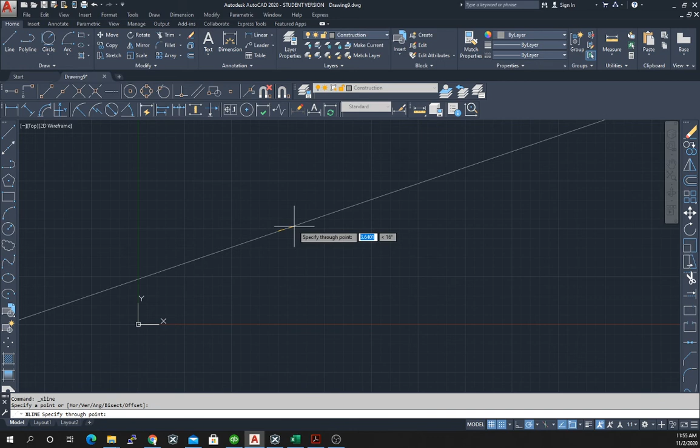So, anyway, I'm gonna start right here, and I'm gonna start on an X line, and I hit return, and this is my construction line, so it makes a line of infinite length. I'm gonna make a horizontal one, and then I'm gonna make a vertical one. So now I have two construction lines. This was basically going to be my starting point for my drawing, for my corner. So if I go back to my drawing, this will be the starting point over here.

Now what I've decided beforehand is I'm going to start with this point 8 inches over here, and this point 8 inches over here, and then this point 6 inches down, and this point 6 inches up. So I'm going to be 8 in this dimension and 6 in this dimension. So I'm going to just make some more construction lines.

We're going to go back to AutoCAD, and again I'm going to choose construction line, and now I'm really just doing grid snaps here. So I can start here and I can go 2, 4, 6, go up to 8 and make a line, hit escape, go to construction line again, come down 8, hit my mouse button, make a line. I said 6, but I went 8. That's fine. We'll leave it at 8.

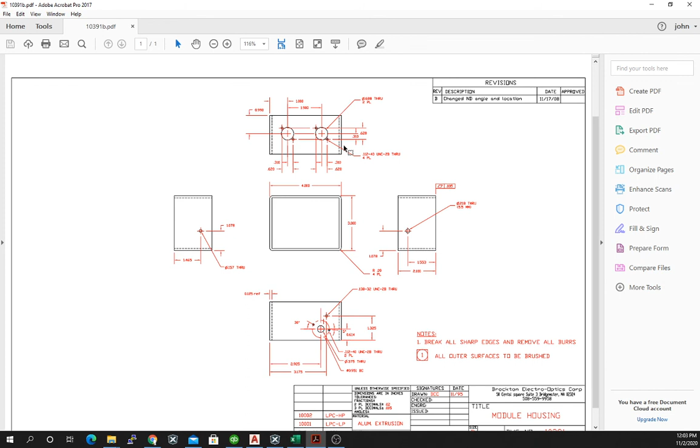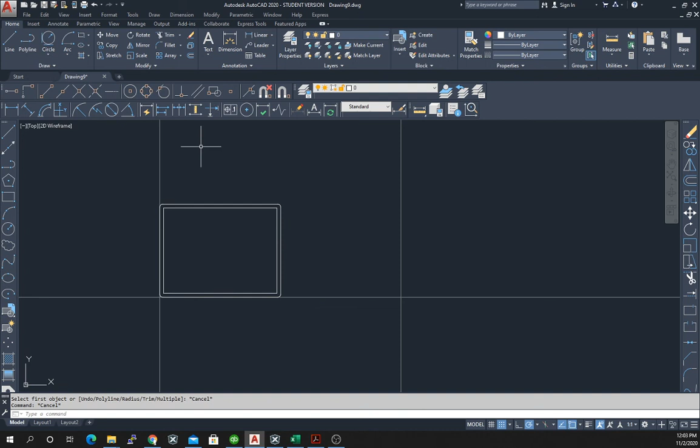Let's move up to this piece here. So here we have another polygon, and its dimension is going to be what? Well, we know it's going to be 4 inches in width, and then in height, the height is actually specified over here, 2.1 inches. So we can come over here. Move over to here. Choose our polygon. Choose our starting point. Hit return.

And then we said 4, 2.1. 2.1, enter, and that places our box. Now, this is the same box that's going to be down here. So let's just copy and move it, or make a copy and put it down there. So we're going to click on this. We're going to choose copy. Now we're going to choose this lower corner as a copy point, because that way we can just bring it directly down to this point.

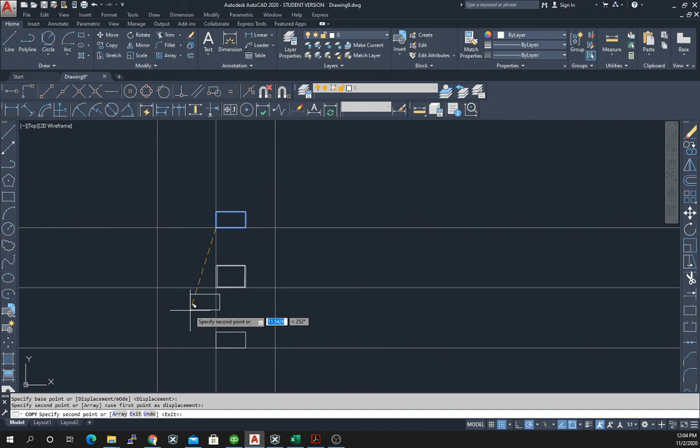All right, so before we continue, we're gonna take a look at 2 things. One is we see that because of the way we're placing, I guess we have the same space here, but we have a pretty large space between these two, between here and there and here and there, relative to what we see on our drawing. And remember, I'd used 8 inches instead of 6 inches. And I think I'm going to correct that. So how do we correct that?

Well, we can just move our construction line. So we can grab it here, and we can move it up. I don't know, let's move it up by 3 inches. Let's move it up by 2 inches. So we start moving it up and type 2, enter, and then we can take this one, move it down by 2,

and then we can do a move of this guy down, and then we can do a move of this guy up. Now in this case, I didn't actually move to the construction line. Oop, and that time I did an erase. So put it back. We select. We want to do a move, and you actually have to use the right click to do the move if you're going to move it so that you move it directly in this manner.

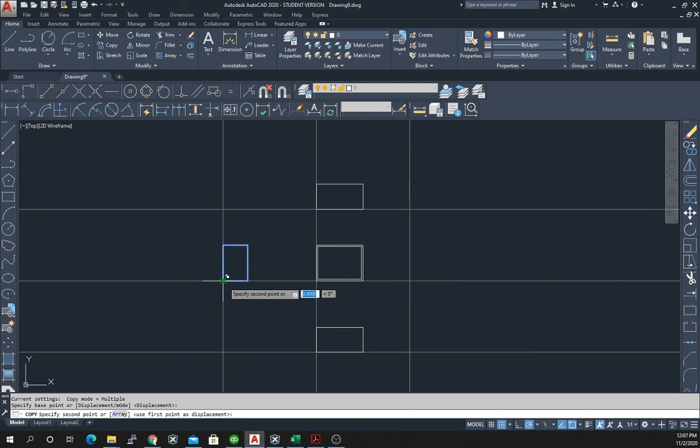So we come back to AutoCAD, and then we're going to make another polygon. And now we're 2.1, 3, enter. Copy. And let's move. I'm going to leave these the way they are.

And the reason I'm going to leave these the way they are has to do with print sizes. If you notice, prints tend to run in a landscape mode, and you have more room horizontally than you do vertically. So it's okay if we have extra room on this side. So we're going to leave those as is.

All right, so now that we have those, we need to start adding the other features. Well, what are the features? Well, we have the hidden lines. So let's go through and add all of the hidden lines. So on the top and the bottom here, what we have is a hidden line, if we go back to the print for a second, that is shown from the top to the bottom, .125 inches away from the outer edge.

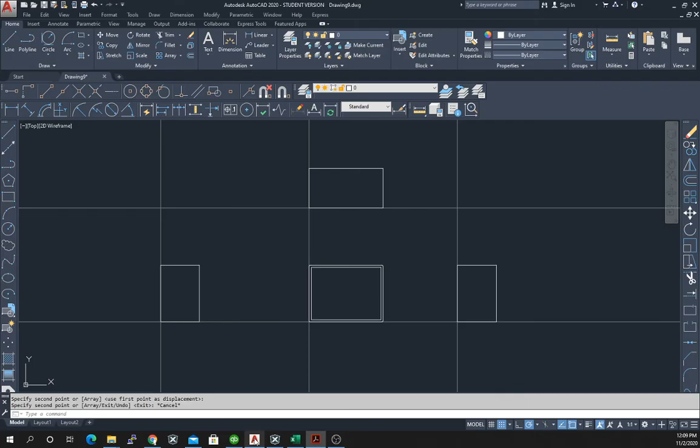So what we can do is we simply come over here and we can take a line. Now, what we want to do, it looks like, do we have tracking? Yeah, so once we get a tracking line, we can type 0.125, enter.

Got to restart that. We first want to change our layer to our hidden layer. Now we can choose our line. Now remember, we don't want to hit our mouse button on the corner. When we're on the corner, we simply pull away. And it's hard to see that you actually have a tracking line. So what we're going to do is turn off our construction layer.

So let's go to our construction layer and click right there. Now the way these layers work is you don't see that something gets turned off until you actually go back to the screen. So once we come back over here, you'll see the layer gets turned off. So now we're in hidden layer, we choose line. Once we're there,

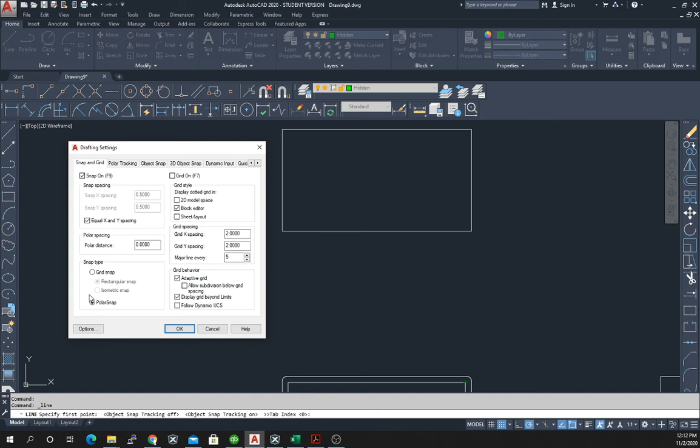let's see what we're set up for. We're on Polar Snap. Object snap tracking is on. Snap cursor 2D reference points is on. Let's look at the snap mode here. Look at our snap settings. Our snap is on. Grid is off. Snap type polar snap. Yeah, we're okay.

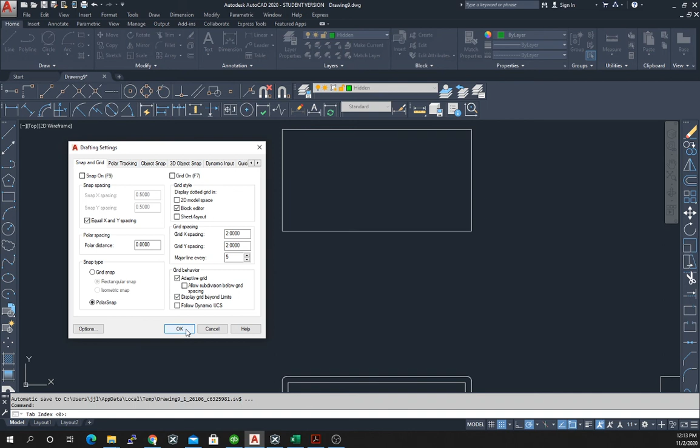All right, so there we go. There's our line. Once we see our line, we're still snapping in 0.5 inch. It wants to snap in those 0.5 inch increments. We can override that, but I'd rather just turn it off. That snap needs to be off. Okay, so see now we can actually move anywhere. It doesn't really make a difference because when you type your 0.125, it still works, but it makes it less likely that you'll make a mistake.

So I type my 0.125 and I move up, and when I get to the intersection at the other side, I hit my mouse button. And now I can hit escape. And what I can do is select this, and then copy it. I'm going to choose the base point at the top here. And then I'm going to move it right to the corner.

But then I'm going to back it back this way. And once I start backing it back that way, I'm going to type 0.125. And it didn't do it. It referenced back to that point. So there's two ways you can do this. You can move this all the way to here, and then select it, and then move it 0.125. The other way is you can calculate, if you know this is 4 inches.

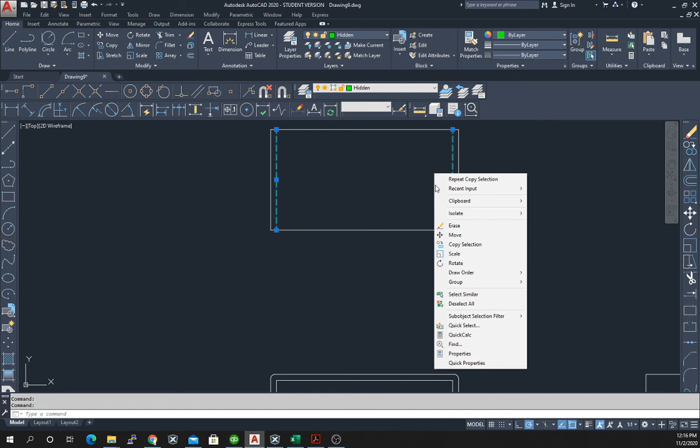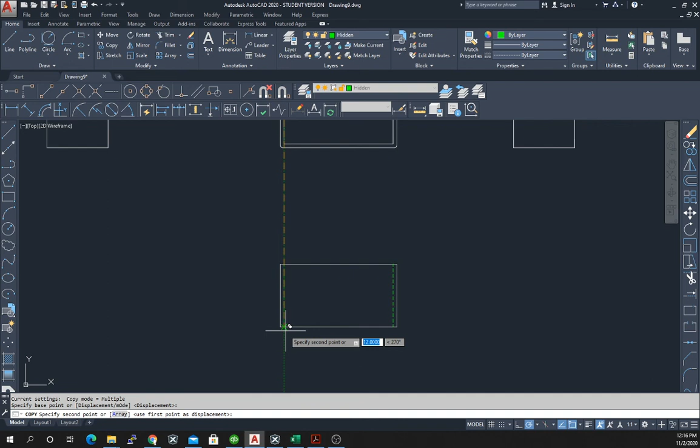Now in order to do the one on the bottom, we can just copy and move this. We can select these 2, then do a copy. Now I'm going to select it from here, and then we can move it down. And it turns out that it looks like the dimension is exactly 12 inches. So we can place it right there.

Now the ones on this side, you can do in a similar manner. And in fact, there are again lots of ways to do this. If you wanted to, you could break this up into parts and then just take this piece, copy it, and change the layer. You could use a snap from.

0.125. Then this, I'm not using snap from here. Again, I didn't hit my mouse button on that point. I just use tracking to space it off. So I place it there.

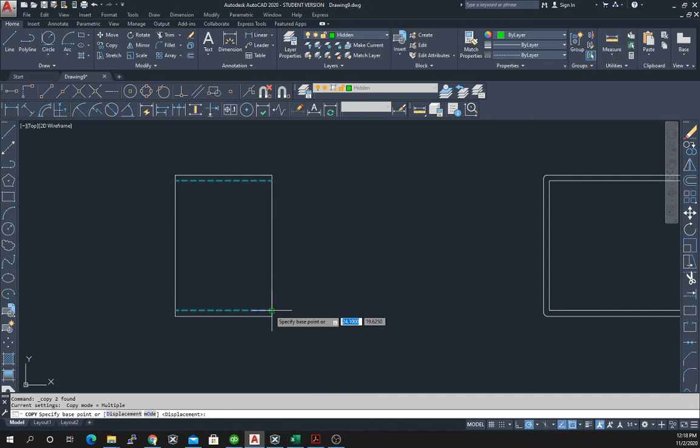And as I said, if this dimension is 3, then the other one has to be 2.75 up. So I can do copy, select, and then move up by 2.75. Enter. And then I can select both of these, copy, choose it here, and then move over to this one. And in this case, we happen to be 16 inches.

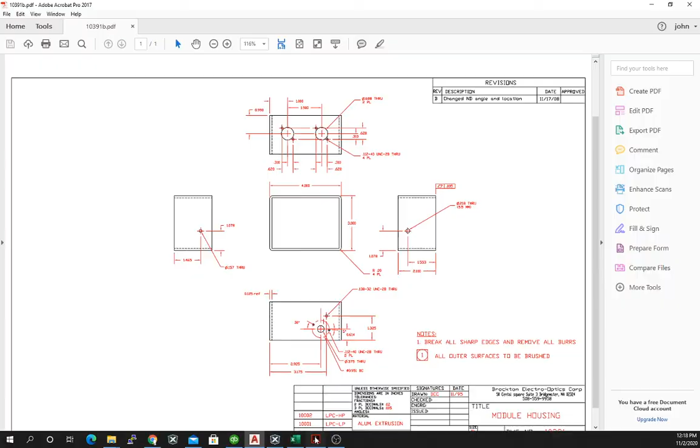All right, so now we have the hidden lines placed. Let's go ahead and go back to the drawing.

We have a 1.078 inch hole located, a 0.157 inch hole located 1.465 from this corner and 1.078 up. And this is typical, that you don't end up with round dimensions. So I'm going to write this down: 1.465 in the X, 1.078 in the Y, and 0.157 through.

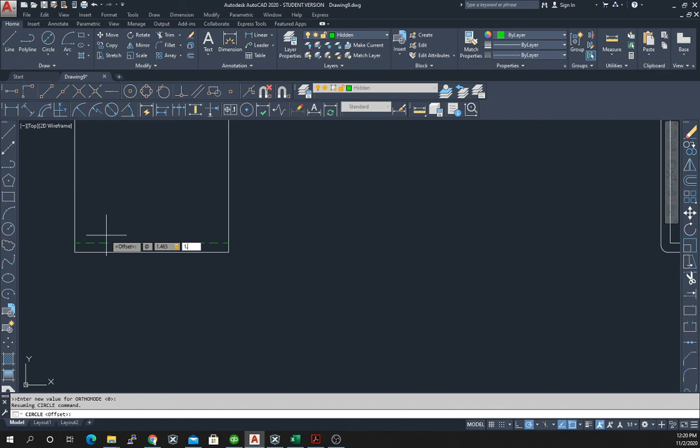Come back to our drawing. And that was a diameter, so we're going to come up here, choose circle diameter. Here we are going to choose snap from. I'm going to click on this corner and then type at 1.465, comma 1.078, enter, and the diameter is

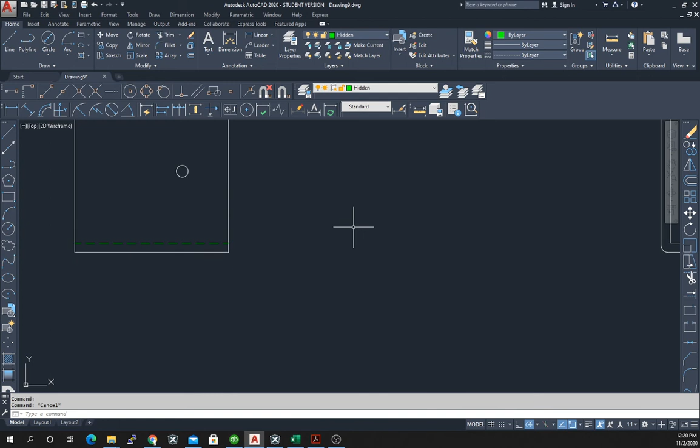0.157. Now you can already see I'm doing this in hidden, which is incorrect. So I need to select this once I'm done, go to quick properties, and then change my layer to layer 0. And again, reminder, the color, you generally never change it from by layer. You don't want to change the color there. You always want to change the layer to make the color different. I'm sure there are some extreme reasons why you might need to do that, but generally that's not the case.

All right, so the hole on the other side, we take a look at our print. It's 1.553 in the X dimension, and it's going to be negative, and it's also the 1.078. The diameter is 0.218.

So we come back to our drawing, circle diameter, snap from, we select here, we type at minus 1.553, comma 1.078. Enter. Oh, and I guess I forgot to change the layer again. 0.218. Enter. But again, that's perfectly fine.

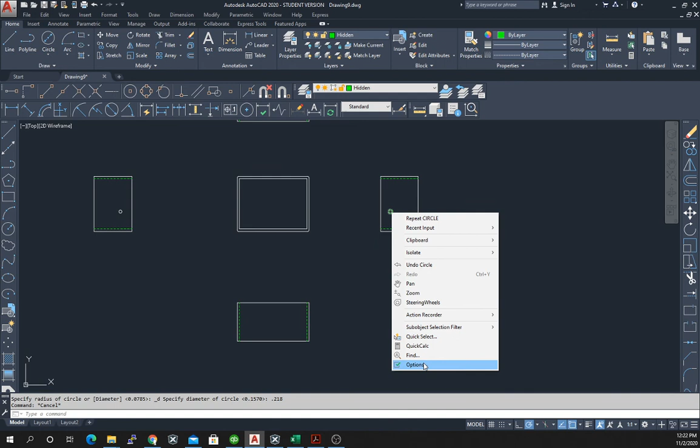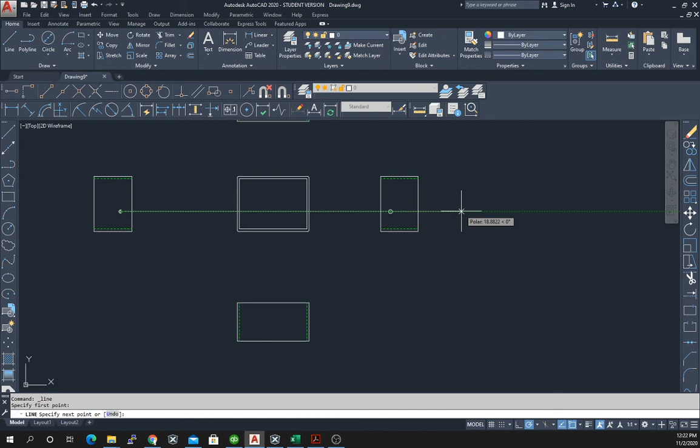We can select it, quick properties, change the layer to layer 0. Now, as a check, we should have a horizontal line that goes directly between those points. And in fact, we do.

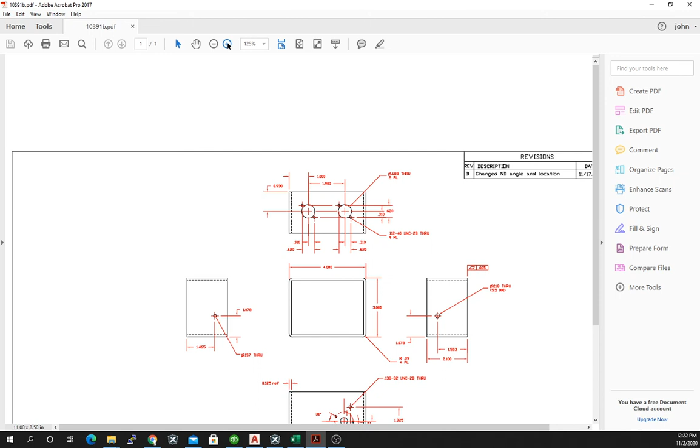Okay, so we've got 2 out of 4 done, or 3 out of 5 done. Let's go back to our drawing for a second here. Okay, so up here, remember, always blow up the drawing to whatever size you need to make it readable.

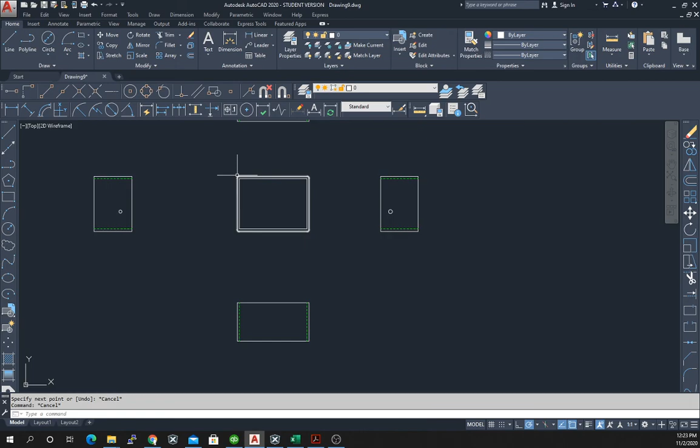All right, so we have these large holes, 0.688. They are 0.99 down, and then one is 1 inch over, and the other is 1.9 inches over from that. So 0.688, so 0.99 and then 1. So minus 0.99 in the Y.

So circle, snap from, we select this, and we type at 1, 0.99, enter, 0.68. I believe it was 0.688, but I'm going to put the wrong number. Let me put 0.680.

Ah, and I put the wrong location, right? Because I must have typed, I didn't put minus 0.99. So let me just hit escape. Anyway, I'm going to type the wrong diameter because I want to show you how to fix that. Just to remind you again in case you've forgotten.

So circle diameter, snap from here. I want to type 1, minus 0.99, enter. And there I forgot the at sign. Circle diameter, snap from here, at 1, comma, minus 0.99. Enter.

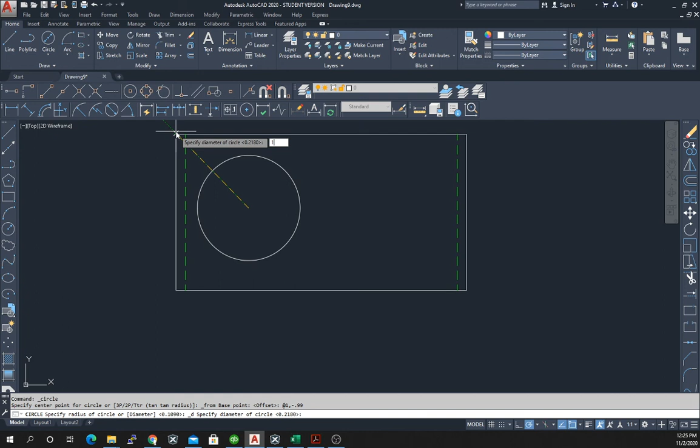Remember, if you don't see the circle showing up where you intend it to be, fix it. Don't continue on. Stop right there. All right, so I'm just going to put a diameter of 1, make it a wrong diameter. All right, so there's our diameter of 1, which is wrong.

And we do want, I'm going to confirm, 0.688. Yes, 0.688. The next one is 1.9 inches over. I'm not going to actually put that in yet, though. So let's go over here, and then quick properties, and we can just change the diameter right here, 0.688.

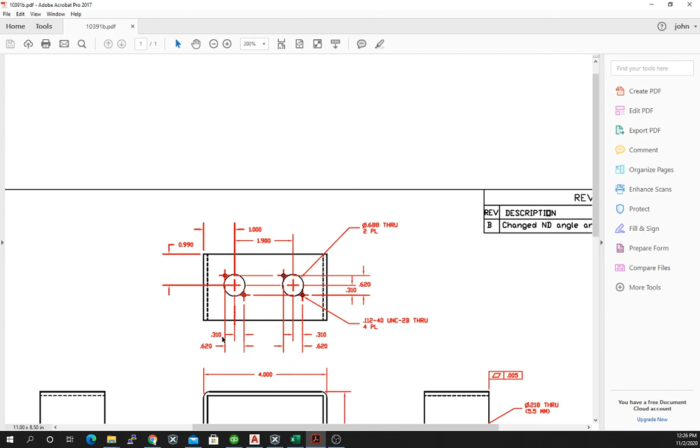Okay, so let's go back over here and take a look. So also we have 0.31 inches up and 0.31 inches over from that center. We have these 0.112 inch holes.

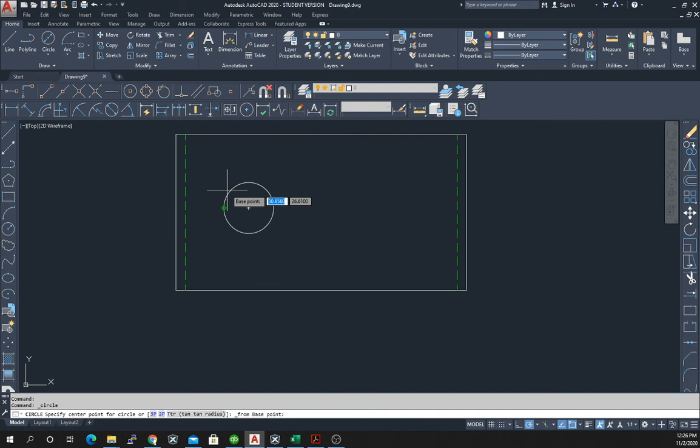So, circle, snap from, we choose the center at minus 0.31, comma 0.31, enter, 0.112, enter.

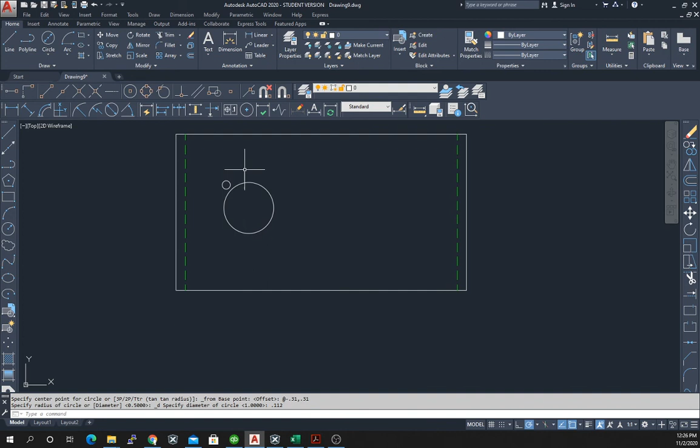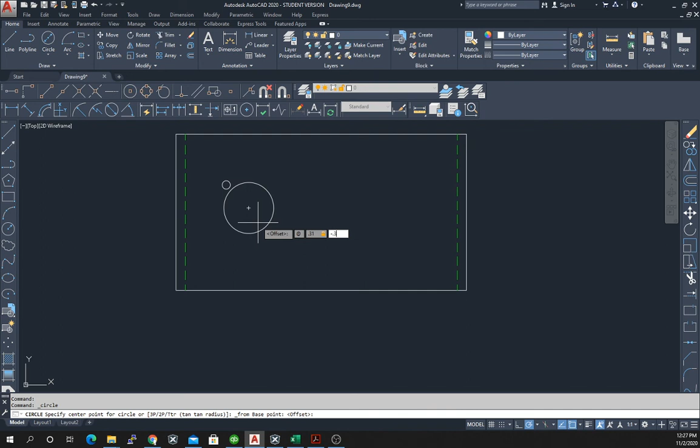And then we can do that again: circle, snap from, choose the center at 0.31, comma minus 0.31, enter. And the 0.112 will already be there, so we can just type enter.

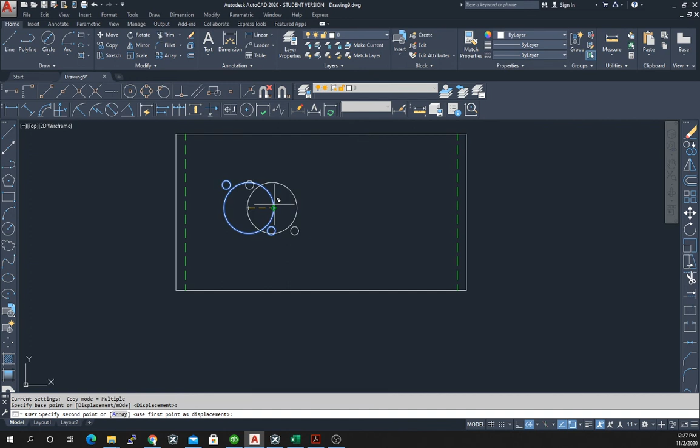So now this whole feature gets copied and moved over by 1.9 inches. So all we have to do is select everything, right click, type copy, choose the center, and then move it over by 1.9 inches.

And that completes this drawing. Again, we haven't done dimensions yet. In fact, we're not going to do dimensions today. I will give you the dimensions video for Wednesday.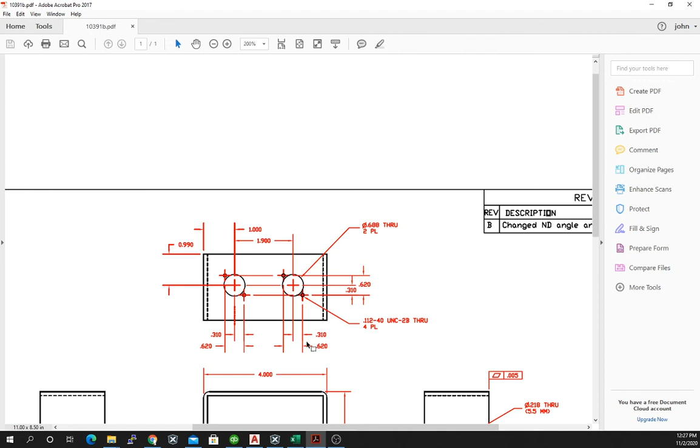So now we have to go and do the drawing down here. So let's first do this very easy hole.

From this edge, 3.175 up, 1.325. So 3.175 x, 1.325 y. We want a 0.138 diameter.

And when we do the dimensions, I'll be talking about what all these numbers mean. Some of you may sort of understand what these mean, some of you may have no idea whatsoever, but I will be talking about them. All right, so let's go ahead and put this 0.138 inch hole in.

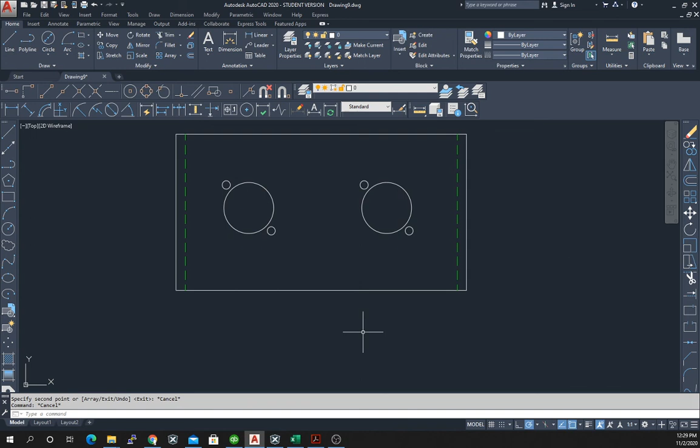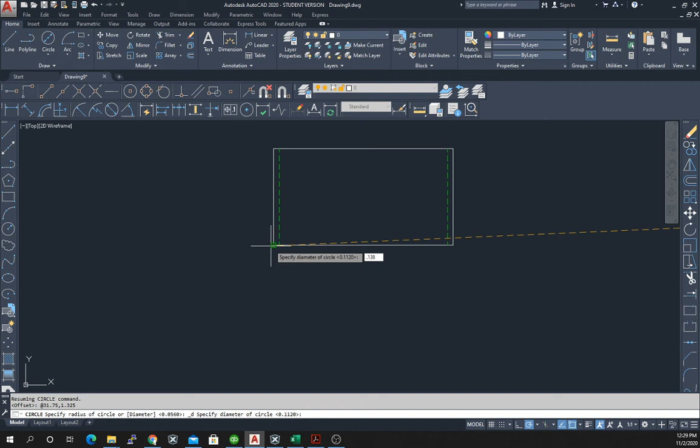So let's come down. And again, we're going to snap from this corner. So circle, snap from, select this corner at 3.175, comma 1.325, enter, 0.138, enter, and our circle is way out of left field.

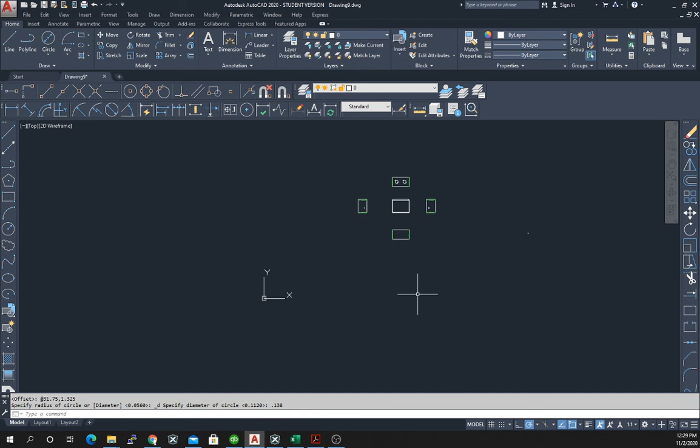Oh, so actually if you look down here, you can see I typed 31.75 instead of 3.175, so that's why we ended up with a circle there. We need to delete that, and we'll go do that again.

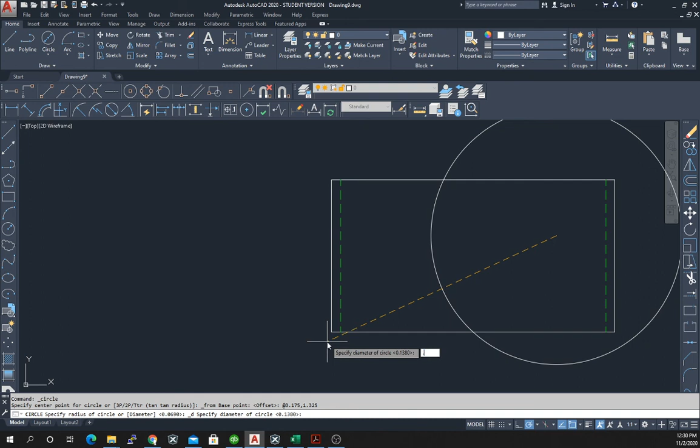So circle, snap from, click here, at 3.175, comma 1.325, enter, and that looks better. 0.138, enter. Okay, so there we have that hole.

And let's go back to our drawing again. So now we have at 2.925, 0.614, we have a hole of 0.375. So, 2.925, 0.614. So circle, snap from.

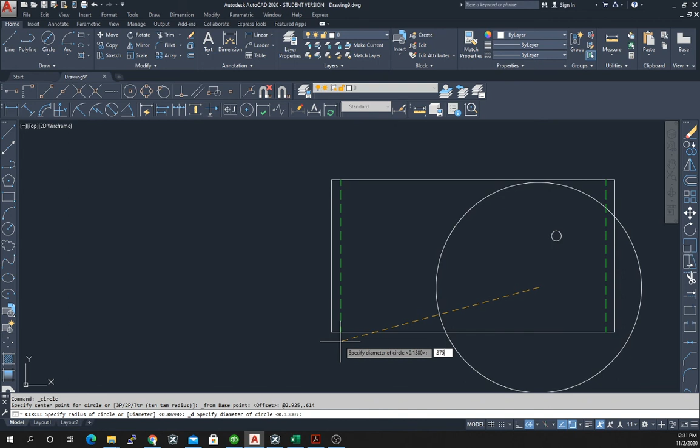So we click on that point, and then we type at 2.925, comma 0.614, enter, diameter 0.375, enter.

And then right on top of that, we have a circle. Well, we have a bolt circle, 0.951. So let's go ahead and put that in. And that's going to be on our center layer.

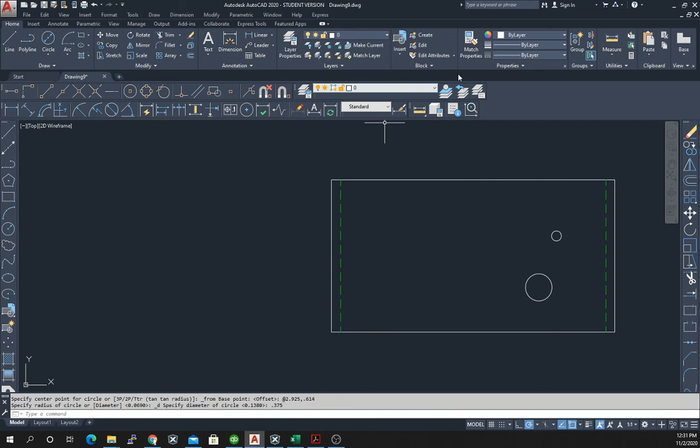So we're going to choose center, circle diameter, 0.951. And then on that,

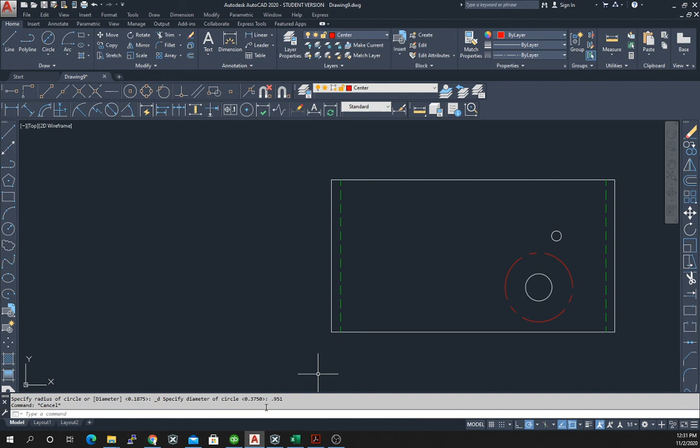we're going to have at 5 degrees a 0.112 hole, and then 30 degrees from 180, or 150 degrees, a 0.112 hole. So we had to put in a hole at 5 degrees down from 0.

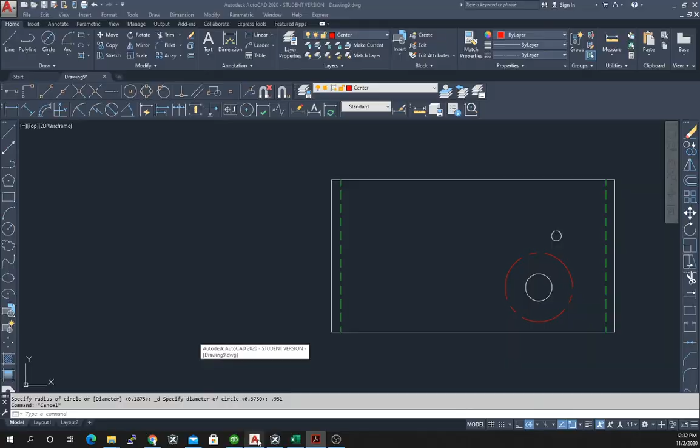So let's come over here to our angle setting, and we can choose our angles. We have 5, 10, 15, etc. And now we can choose circle, (355). That would be our 5-degree angle. Right there is the intersection with the bolt circle. We hit return.

This is pretty common, that you don't switch back to the center layer, and this is why I don't automatically take my time to make sure that I do it, because it's just a reminder that it's a very easy fix. So now we put our 0.112 hole in,

specified diameter, 0.112, and now we can come over here, quick properties. Our layer needs to be layer 0, and so that we get the other one right, we'll set that to layer 0.

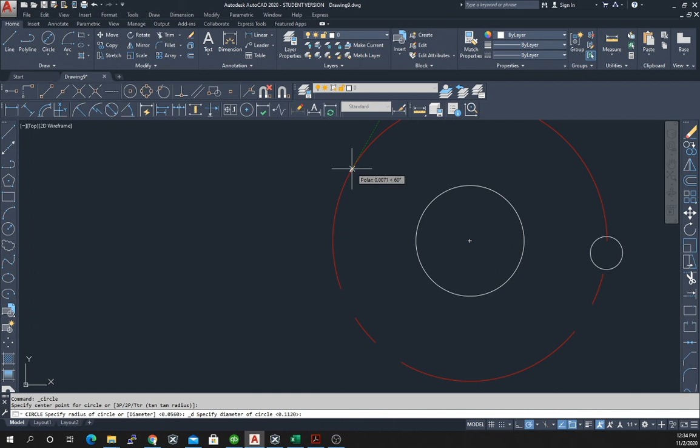Now that we've done that one, we want to change the angles so that we're only at 30 degrees, so we don't have so many angle lines. And now we're going to place the second circle at 150. 150 is 30 degrees off of 180. And here all we have to do is hit return, because it's going to default to that 0.112.

Okay, so we come over here, we hit extents, and there we have it, I believe. Let's take a look at our drawing.

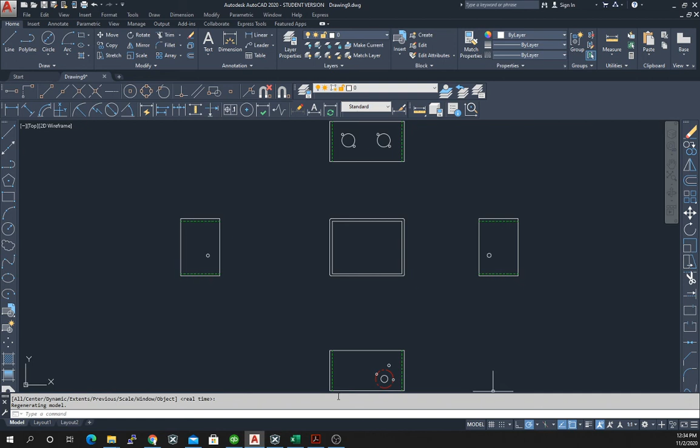By the way, we'll be talking about the background and the pages a little bit later. So we're sort of doing this one step at a time. Okay, so yeah, we should thoroughly check our print.

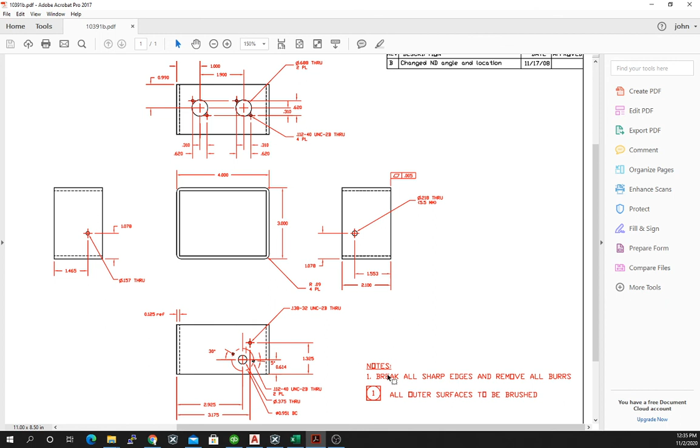And again, we will get to dimensions. We're not going to get to it in this video, but you will see it on your video for Wednesday. All right, so we're all set. I'm going to end the video now.